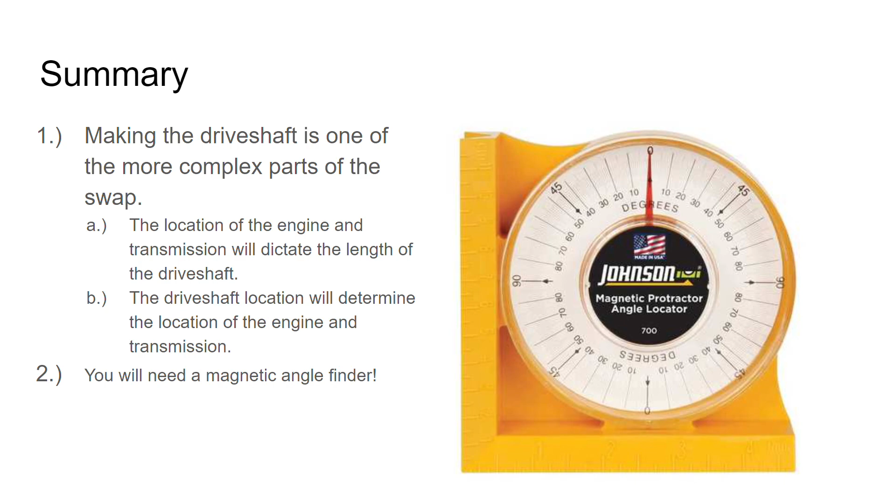It's up to you. So I'm going to start off by saying what my transmission is. I know this is redundant, but I got to say it again because people still ask what kind of a manual transmission I used. I'm using a 4L80E automatic transmission from an 04 Silverado. It has a slip yoke design.

Normally, the 4L80E is pitched downward 3 to 5 degrees. This is done because in a truck, the rear axle is much further down, much lower to the ground than the transmission itself. This is meant for clearance. Well, that's totally not what's going on in a BMW.

Also, the Silverado has a live axle, which is another reason why it's using a slip yoke, because that axle actually travels up and down with the suspension, which means the yoke slips in and out of the transmission. Also, some Silverados do use carrier bearings, some don't. But then again, we're really not concerned about what the angle was in the Silverado, just letting you know that's kind of what we're working with here.

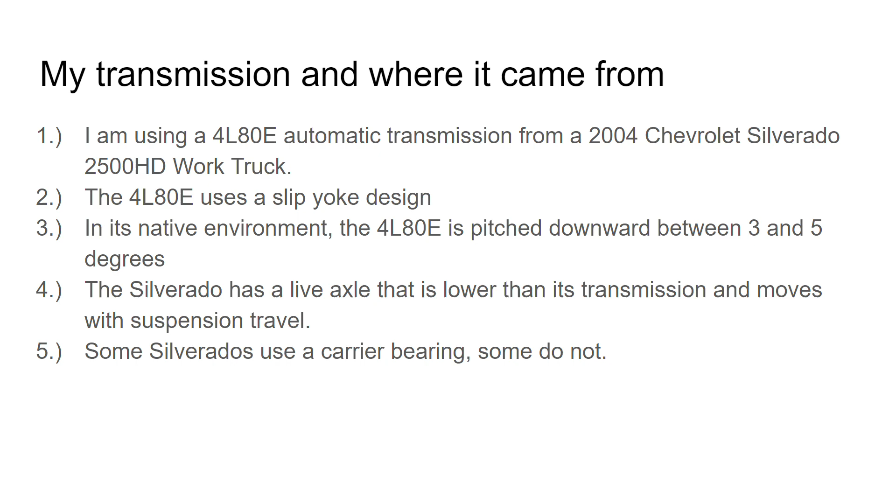So on the E38, you have a level drive line. With the ZF trans, it's just a straight shot from the ZF trans to the diff. So that's just a level line that goes across there. In the E38, the differential does not move.

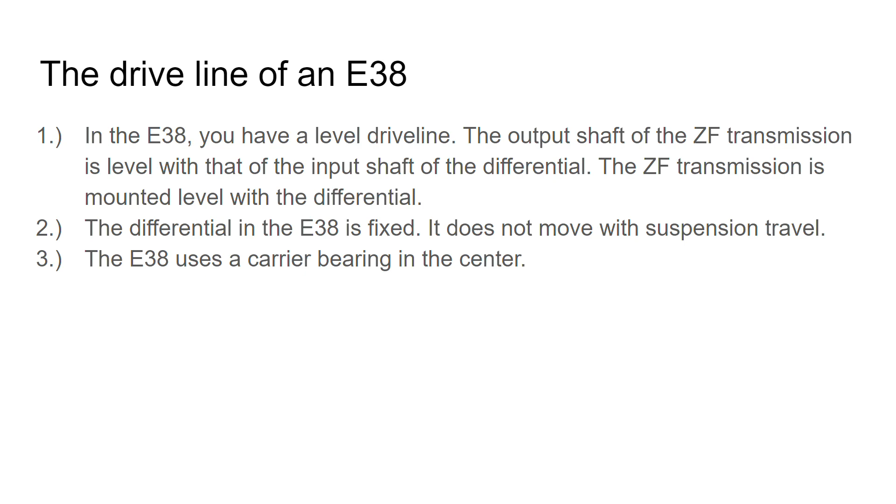You have constant velocity joints coming out of the diff on each side, so that's what moves, but not the diff. And that's why the only reason we're still using a slip yoke here is because we're trying to accommodate the 4L80E trans. If you get your hands on some other trans, maybe something from a Camaro that doesn't have a slip yoke, then you're kind of staying in theme there.

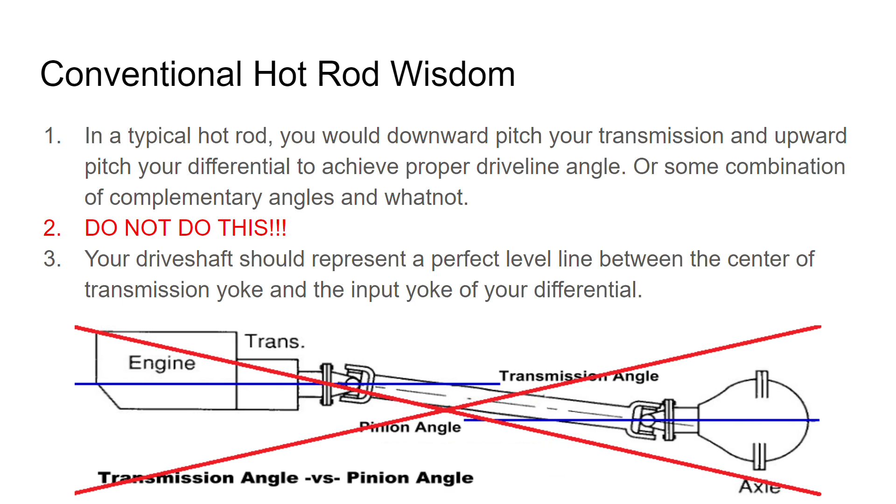So the way I was brought up when I started getting into this is what you would do for a conventional hot rod. You would down pitch the transmission some degrees. You would up pitch the axle and try and get the complementary angles going on there. You don't want to do this in this application. You just want the trans to be level with the axle itself. So it should be a perfect line leaving the trans all the way back to the diff.

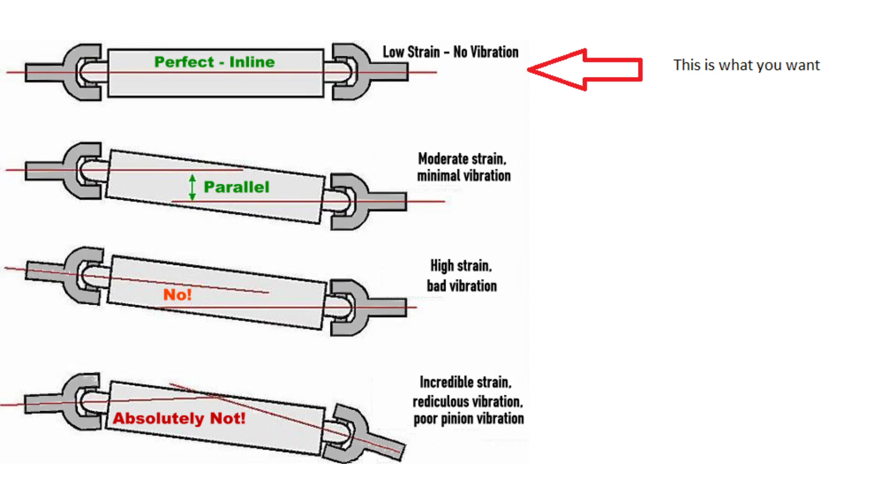So don't have your mounts built at this point. You should get this angle lined out and just have some blocks of wood under the transmission and the motor. You're still playing around at this point before you set anything in.

If you're trying to get it down to the exact degree, perfect everything, because maybe you're starting with a rolling chassis and you don't have the engine and transmission, you're going to need to level the car first. If you're just using jack stands in a garage, that's going to be pretty darn hard to do, pretty much impossible. So what you really want is relative level, and you can do that by just putting the angle finder in your door jambs, or your door sill right at the bottom. Put it on the radiator core support right on the front, if you want to know what it is left to right, and whatever it is, just write it down.

Because in my case, I actually had to move the car in and out a few times from when I started to when I ended. But ideally, you would take all these measurements once you have the car up on jack stands, you have enough room to crawl underneath it and work and do everything. That's kind of the point here.

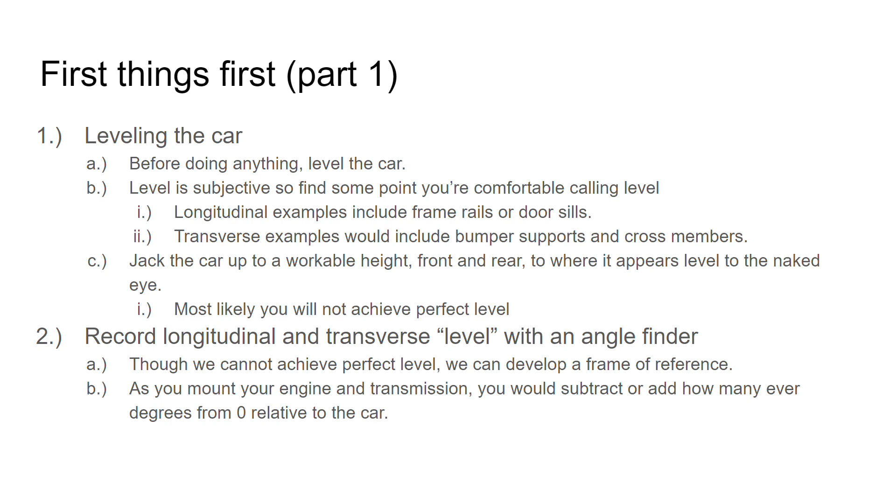Then you're also going to record what left to right is. Where you measure from, that's up to you. Just remember to use it again the next time you take your measurements, especially when you're trying to locate your 4L80E in here. A lot of drive angle things go on, but if you want to cut out the complications, just record what the ZF trans was pointed at before you take it out, and make sure the 4L80E is doing the same thing when it goes in.

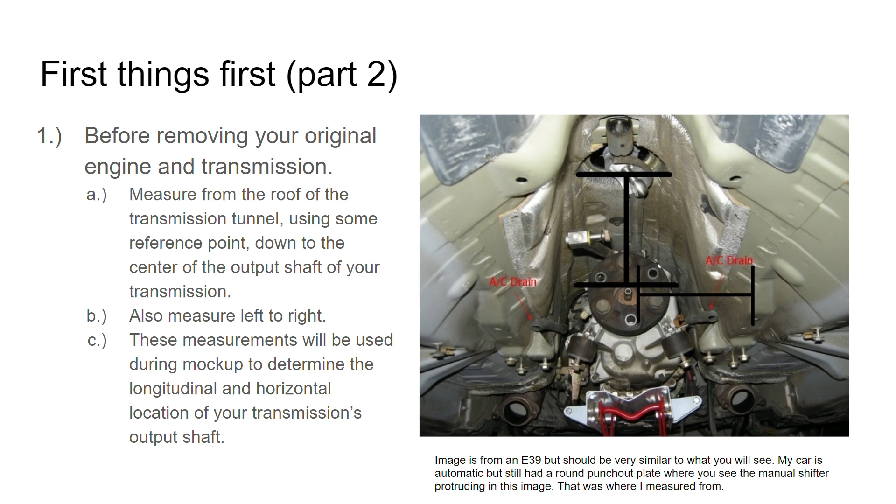That way you preserve the proper driveline angles that BMW put in place, and the complications kind of fall away at that point. But remember to write this down and get it done before you start pulling everything out of the car. So also, you need to measure the angle of the output shaft of your transmission. In theory, it should be 0, but maybe it's 1 or 2 degrees off. You never know.

I didn't write all this stuff down. I was just going by what was in the shop that day. In fact, I've done this on a couple other swaps, so this entire process took me about a few hours to set it all up, so it wasn't a problem. But make sure that you measure what the ZF trans was before you take it out, and make sure the 4L80 is the same as what that is when it goes in.

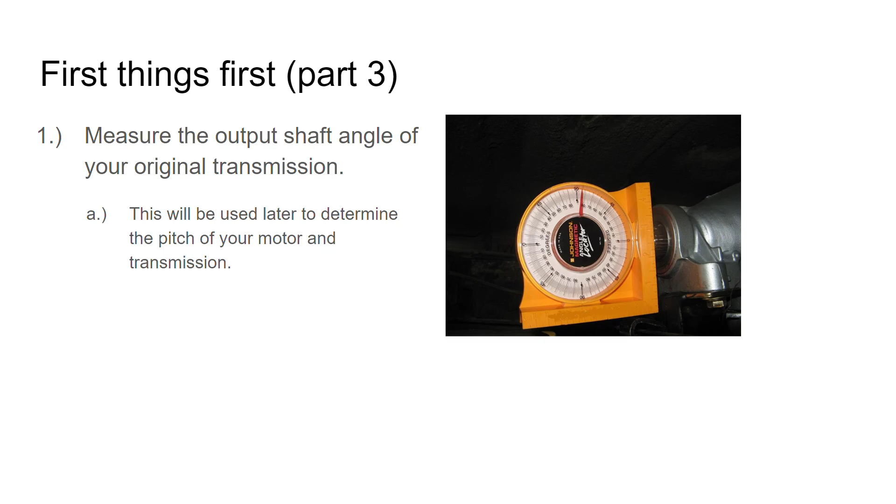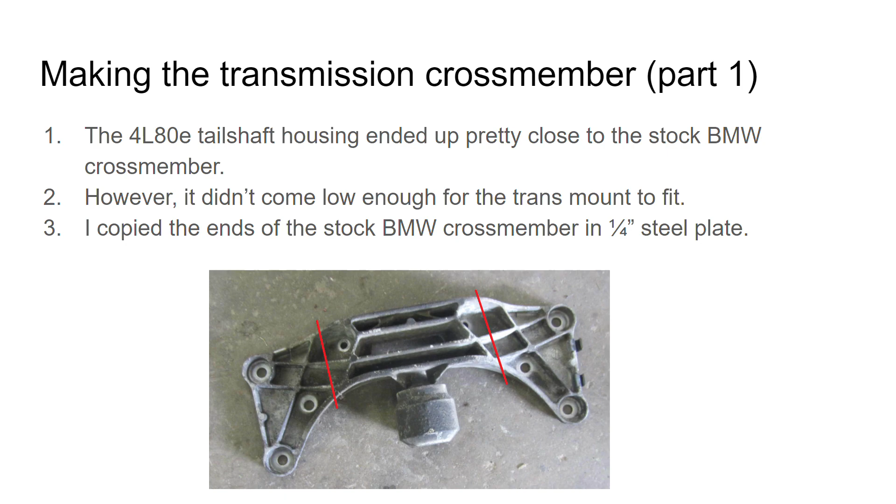So there's that. So this is the cross member that's coming out of your E38. It's really close actually to the 4L80E trans. The only problem I had was that you would need a super thin mount. It was so close, I wish I could have saved it and used it, but there just wouldn't have been enough room for a mount. So I went ahead and, not lopped off the end pieces, but I replicated the ends of this cross member in steel. And that was what I used later on when I built my mount up.

There are some shops out there online that will do it for you. I was just in a hurry, wanted to get it done, and I know how to field balance a drive shaft, which is a little bit of a skill. So if you don't know how to do that, that's fine.

The key thing I can't stress enough is don't try and weld this in your own garage. That's a very bad idea. You're more than likely going to get it wrong. Let the pros do it on a machine. They have gauges. They can do this down to the thousandths of an inch and get everything dialed in. The last thing you want is a driveline vibration, an incurable one at that.

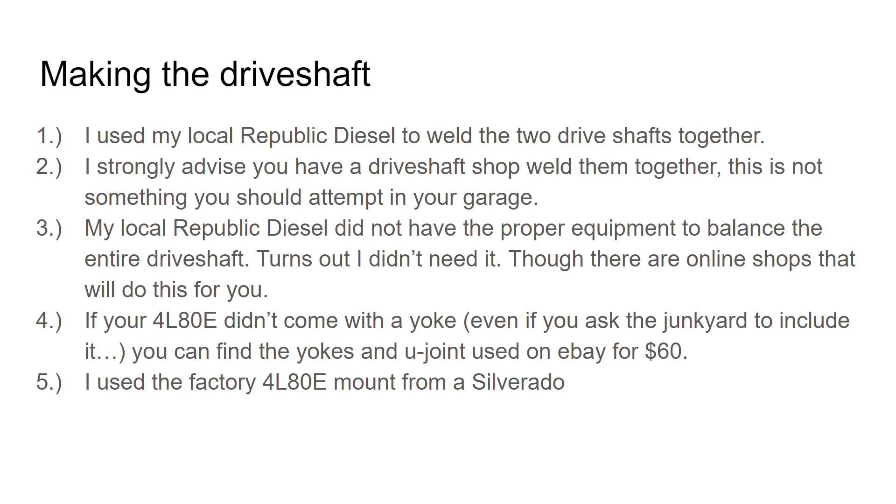So this is what it takes to get the length right on your drive shaft. The car's going to be up on jack stands when you do this. Having the back wheels off the ground is nice, but you don't have to have it because, again, this is a fixed diff where how much suspension compression you have means nothing here. It's really about, is the transmission resting on what it should be resting on?

So with this here, you're going to install the 4L80E yoke into the trans. You would do this with the U-joint still installed, and you slide that into the trans and then back it out 3/4 of an inch. The reason you're doing this is not because you're trying to get some kind of proper clearance. It's because in the future, if you want to remove your differential, that 3/4 inch slip in the joint there will allow you to pry the constant velocity joint away from the differential area to drop it down. That's the only reason I even did it.